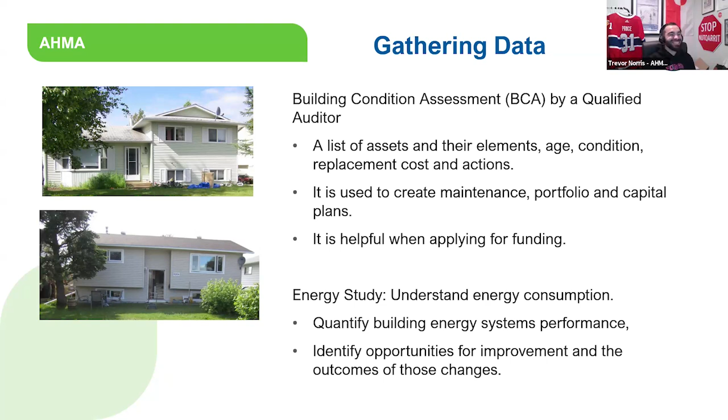Yeah. +30 to -50, that's our weather here. It's kind of a big range there. Okay, well, thank you so much.

Next, I wanted to introduce Arno, who's going to take us on a deeper dive into the project and the energy audits process. Arno Bredenkamp is the principal consultant and owner of GreenSpace EcoConsulting Services. He's an energy manager, a certified energy advisor, engineer, and entrepreneur. For the past 15 years, he's performed energy audits in the Okanagan, Shuswap, West Kootenays, and Vancouver Island. And he's completed more than 1,000 EnerGuide energy assessments at privately owned homes, as well as larger energy efficiency consulting projects for First Nations and Indigenous housing societies. So thanks for being here, Arno, and go ahead with your presentation.

Yeah, thank you very much, Alvin. It's nice to do this as a run over all the EnerGuide rating questions, but also I really appreciated DeAnne inviting me to come up to Fort St. John right when Site C Dam started producing electricity. It was a wonderful experience. I will remember it for a long time. It was quite impressive to see that big dam starting to push out the electrical energy that we so dearly need. Thanks, Alvin and Erin, for allowing me to speak.

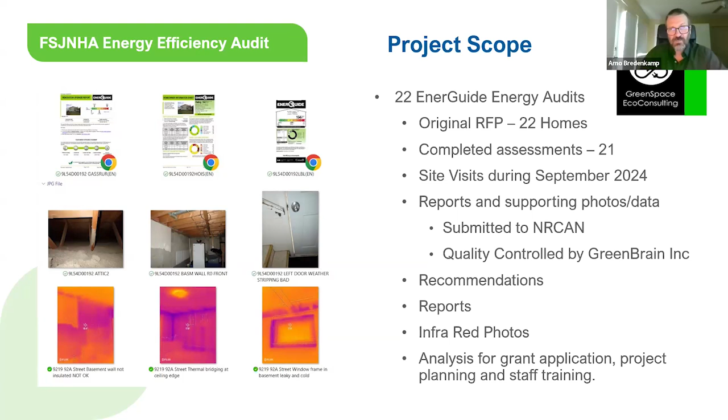So all of this is based on a process called the EnerGuide rating system, ERS system. And this is a system that was designed and managed by Natural Resources Canada. And it's like a labeling and performance testing process that would normally be used to test components like white goods, appliances for the kitchen, or any other system. So there will be a label attached to this item, and in this case, it's attached to the home that we rate. The system wants to achieve energy literacy among the stakeholders, so it wants to try and make people more aware about where energy is consumed and why the energy is consumed. So in other words, what is burnt, like is it fossil fuel or electricity, and then what are the reasons for it.

The other output is also to help give performance information about housing to the government levels. In other words, it will also help people to say where homes are lacking and where money should be spent. The focus would be to reduce cost and increase comfort, and also increase health, because comfort and health are sort of the two horses pulling the wagon. We want to make sure that air quality is good and heating and cooling comfort is achieved. And then on the other side, also reducing the environmental impact of housing in Canada. So it will show what the greenhouse gas impact of this specific home is on the overall picture.

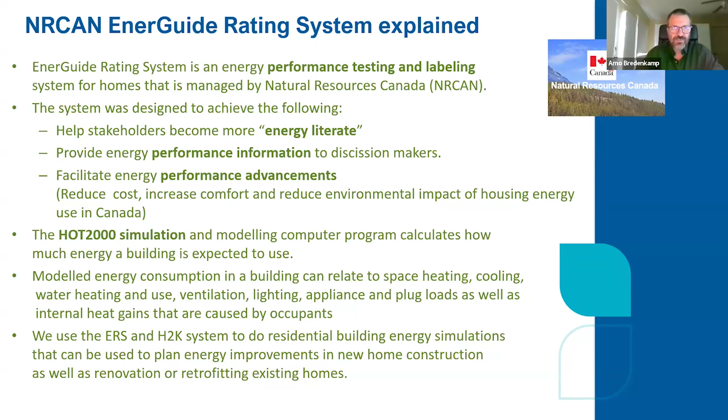So the ERS system and the H2K, HOT 2000 systems, are used in Canada to do building energy simulations that can be used for the modeling of new homes before they're constructed, but also the renovation and retrofitting of existing homes. In other words, we can use it to predict heat losses and heat gains, and we can also use it to predict changes in the house if we do upgrades or renovation improvements.

So the next item is focused on what is produced with this HOT 2000 program and what is the output of the EnerGuide rating system. So what you've got in front of you is an EnerGuide rating label. That is a label that you would normally find on the electrical panel of a home, or otherwise it might be, like in DeAnne's case, somewhere in our files, and it can be used to reference this home with other homes. So what we can see is obviously the date and the location of this energy assessment, and then a bunch of numbers.

So the number that I'm pointing at, the 128 gigajoules per year, that is a calculation of the home's energy consumption if it's built today or this year, using current building code requirements. So it's sort of the baseline or the comparative number for this home.

Now, in this case, we can see that the home's EnerGuide rating, as measured or simulated, was 138 gigajoules per year. So it's a little bit more than the typical home EnerGuide rating. So this shows us there's a little bit of room for improvement just to get to the building code requirements. So this would indicate that this is a house built to a previous building code requirement, or maybe it was not that well built.

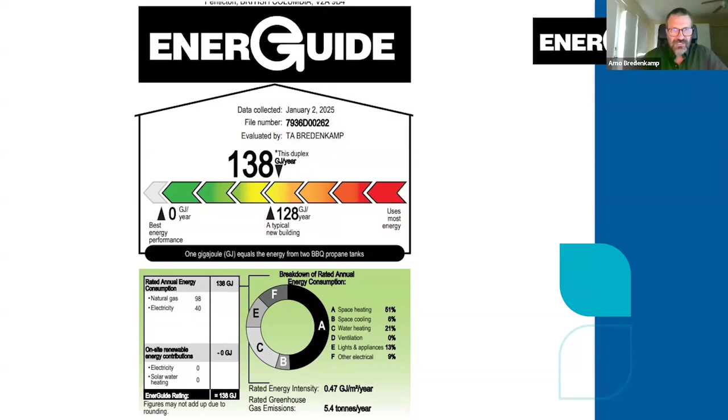And I'll also sort of make a joke. So in Canada, we have 2.5 people living in the homes on average. So it's 2 adults and a child that's usually living in our homes when we do the modeling.

Now, air tightness improvements are always very important because it's usually a low cost or a no cost upgrade. But then attic insulation and wall insulation is also quite important because you want to insulate your envelope before you start adding better or more efficient heating systems, because it's better to consume less by having your heat loss or cooling reduced before you want to try and implement systems to cool or heat the house.

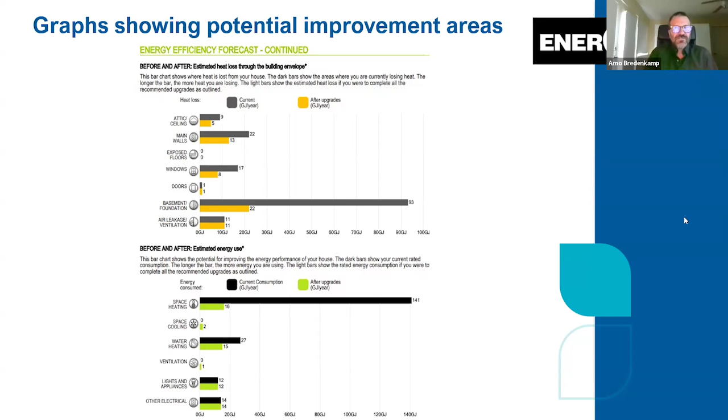So it's quite important to do your envelope improvements, your insulation improvements, before you start looking at your systems, because by doing the insulation first, you might end up with a smaller requirement on your mechanical systems. So you can install a smaller heat pump or furnace after you've added the insulation. So these are the outputs normally given during or after an energy assessment.

In the case when we do multiple assessments, like in a project that we did for Fort St. John, I compared, and the summarized findings are quite interesting. The highest consumption per home was 194, and the lowest was 95. So there's a difference of nearly 100%, or 50% of spread over the homes that we did. That's because some of them had only a little bit of insulation, and some were recently renovated and quite nice. We can also compare with typical new homes: on average, homes were 23% higher than the typical new home.

I also analyzed the homes by looking at specific upgrades, and that's also shown. With space heat upgrades and tankless water heaters, we can reduce the consumption by 67%. And if we do an electric heat pump for space and water heating, we can reduce it by an additional 6% to get to 73% energy reduction and nearly 98% greenhouse gas reduction. So quite a lot of upgrades are possible in these homes.

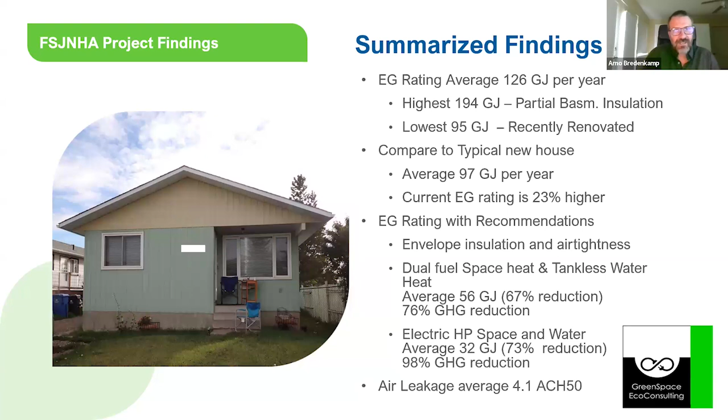Because in many cases, with authorities like we're talking about, we are dependent on getting funds from programs the government has running to help with funding upgrades. And we need to meet the requirements of those programs in terms of performance criteria, improvement criteria, and reduction of greenhouse gases to get the funding. This is a tool that I would use, but it can also be a starting point for the project manager to guide him in his funding applications.

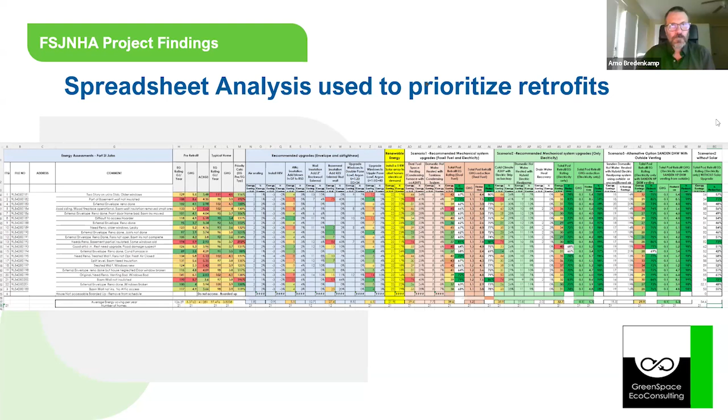So what we're doing now is looking at the process. Just to recap, the site visit includes data collection. So we go around taking photos of the house, measuring areas and volumes, checking the R value and the amount and type of insulation that's installed, and capturing the type and energy use of mechanical systems. That would be water heating, ventilation, cooling. And then we do a blower door test.

So first of all, ACH50 stands for air changes per hour at 50 Pascal depressurization. And what it really means is we try to predict the number of times that the whole volume of the house needs to be replaced when there's a pressure difference of 50 Pascal between the inside and the outside.

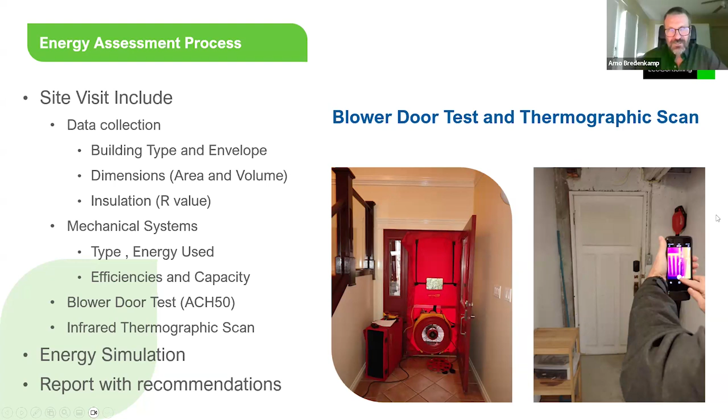The next couple of slides are based on that principle. So I'm going to just show you a few of the slides and maybe discuss them. So first of all, the color scheme that I use is the darker blue areas are cold and the warmer orange white areas are hot.

Now, what we have on the left-hand side is a photo of the bottom of a door taken while I'm running the blower door in depressurization. So air is being sucked out of the house, and therefore the air, which is in this case cold air, is trying to come into the house, and it's seeping in under the door sweep that's non-existent. So this door sweep is either deteriorated or it's gone, and we can see the cold air being pulled in from underneath. So the recommendation is replace your door sweeps, add weather stripping.

The middle one is quite funny. Lisa and DeAnne already discussed that. This is one of those terrible air conditioners that had lots of air movement around the pipe. And this is a cardboard that was put in the window. And you can see it's got very little insulation if you compare it to the wall around. So this is an air conditioner, and that's a window with a pipe going through.

And we can see, not good if you have that system installed to cool the house, because the cool air will just go out again. And in this case, it was cold outside. So we can see the cold air actually being sucked into the house or pulled into the house because of the insufficient insulation of the tube.

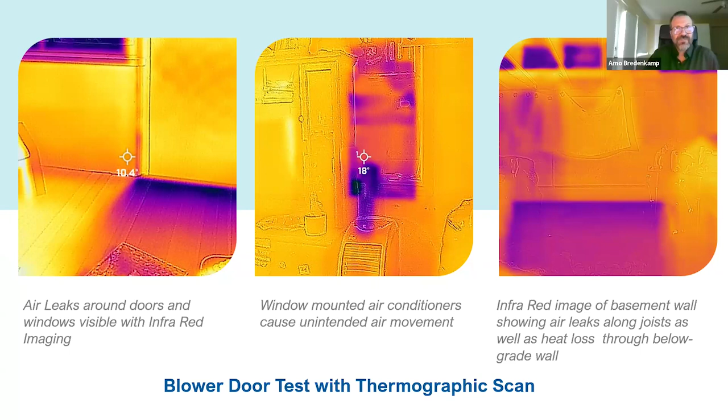So another one that's quite interesting, we have a concept called thermal bridging. And thermal bridging happens when you have different R values or insulation values in an assembly. Like this is a wall, and you can see the dark lines running down, and those are due to the wooden studs that have a lower R value, less insulating value than the stud bays that were insulated.

We also see the corners and the ceiling to wall edges that are quite dark because of heat loss happening. And the heat loss happens because heat would go through where the R value is the lowest. The path of least resistance is another way of putting it.

So this can be reduced if we add insulation to the outside of a wall, in other words, wrapping the whole house with external insulation. And that will then insulate the studs on the outside and reduce the heat loss through the assembly.

These two photos are actually a normal visual photo, and this is an infrared photo of the same basement. The insulation was removed over there, and we can see the impact it has. So all the heat would basically sneak out there. So the insulation that you have there is really wasted because once again, the path of least resistance is through that area.

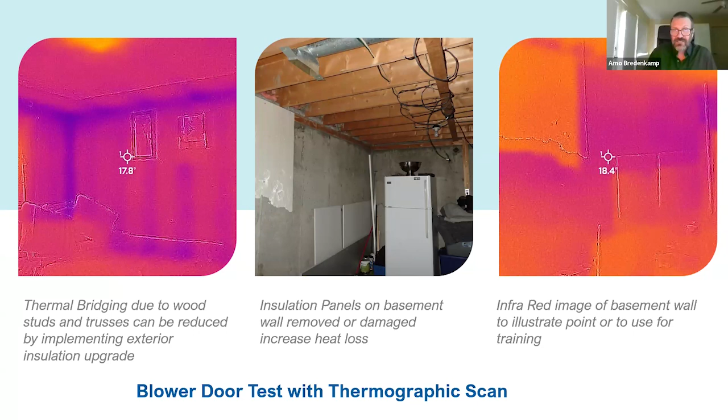So when doing the blower door, air is sucked out of the house, and this is a photo of the attic hatch. So what we see here is cold air coming in around the attic hatch, and it's quite substantial. And it's so easy to prevent, because you basically need to just add a $2 value of gasket around the attic hatch to prevent that from happening.

So this is quite an interesting one, usually for maintenance workers to see, because it's something that's quite easily just ignored. The middle picture is I projected the infrared photo over the visual photo, and beautiful wall. Everything looks very, very normal, except you can see those terrible spots in the corner and above the window. And I believe that is because of moisture damage in the walls that caused those low R values.

And by the way, DeAnne, don't worry, this is not one of your homes. This is one that I just snuck in because it gave such a nice picture and would help people understand what you can achieve with the EnerGuide rating using infrared photos. So this is a photo taken at another home, but it's quite obvious that this needs to be fixed, because otherwise it can lead to structural damage and other things, mold, whatever.

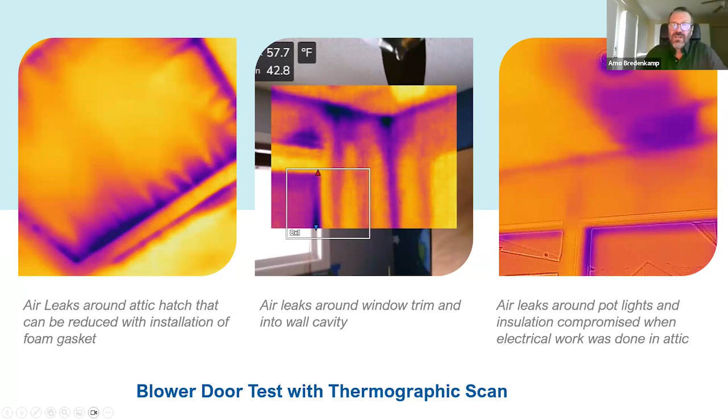And what you really need to just do is ask electricians or people that do work in the attics to replace and repair the damage that they do while crawling around in the attics.

So another picture, kitchen, beautifully renovated, but gaps in the wall because insulation was not replaced when they did this kitchen upgrade. Middle picture is a bay window, quite common. Bay windows would have insufficient insulation in the bottom and the top part of the window assembly that's installed in a rough opening. So a window is taken as if it's good, but in actual fact, it's a really, really bad assembly, because heat loss is quite substantial through the bottom and the top.

On the right hand, also a picture taken in another home, but it was quite interesting. I thought this is a beautiful renovated home, and I walked around and I found this in the main bedroom.

So it's the main bedroom bed right there, and this big black area behind the headboard is the wall facing the garage. That was this damage from the garage side. They had water damage in the garage. They removed insulation in the garage wall and they never replaced it.

And now there's an area of insufficient insulation behind the person's bed. And they complain about feeling drafts and cold in the bed, and they wouldn't know because it's basically insulation that's missing in the wall. You can only see it if you use a thermal camera.

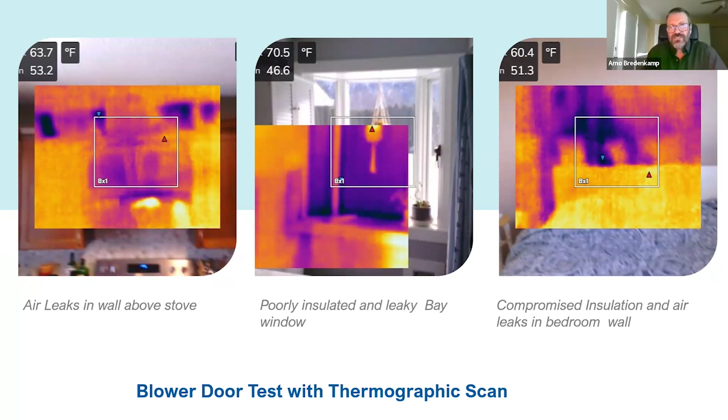So my final recommendations would usually also be to say, all right, what can housing associations do? What are their focus areas, and also what can they maybe include in their project planning? Now, what we've found is older space heating systems need to be replaced or at least maintained. And by having a look at the different systems, you can see if there's problems coming up.

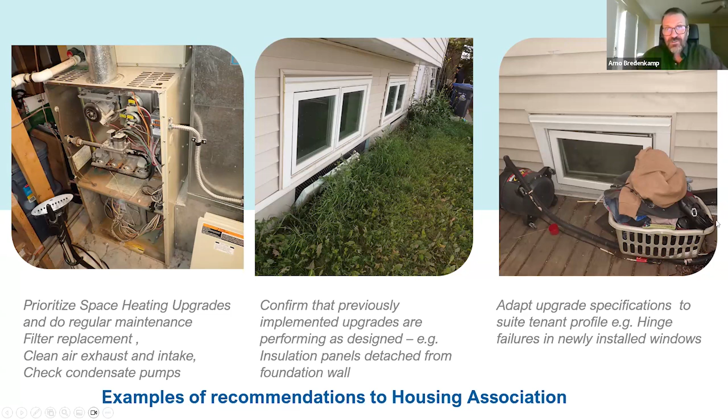We could also review the houses that were really good and learn from those. Thank you. This was my last slide, and I'm now handing over to Alvin again. If there's any questions that came in through the chat, maybe I can address those.

Great, thank you so much, Arno. I did want to quickly go back to DeAnne. If you wanted to tell us just a little bit more about where the project is now for the Housing Association and how these results were used.

Please go ahead. So actually, we work closely with Trevor and Tuan as well, Archie with AHMA, with these projects. So with the energy efficient studies that we had about 3 years ago, plus we've had hazmat studies. We've also had radon testing, as well as we worked closely with, like I said, AHMA as well.

So we have the hot water tanks that just went in from gas to electric, and then also we had the air conditioners in there a couple of years ago. But Trevor probably can touch more on what our next steps are here.

Trevor. Yeah, so we have just recently secured some funding to do some work. Right now, between DeAnne and her staff and myself, we are determining exactly what we're going to do with the funding. The EnerGuide reports are for sure going to guide some of this, and then we're also planning another future funding request that will address things that our current one doesn't. In the near future, we're expecting to do that.